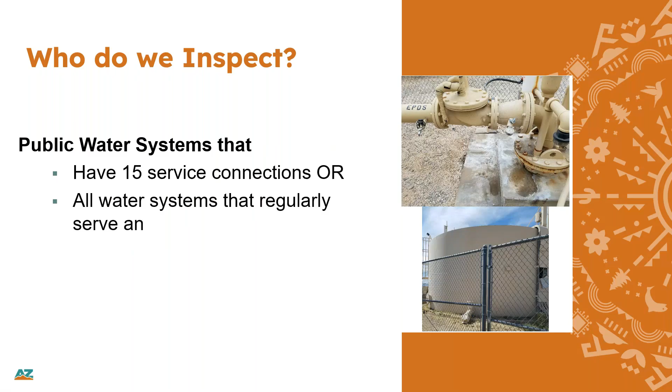There's more definitions for what a public water system is. It could be serving a population of 25 or more people for at least 60 days out of the year. There's some differences in what types of water systems there are, like community water systems, non-transient non-community water systems, and the third type being transient non-community water systems.

Each of these have their own criteria. Community water systems are more of your larger municipalities, your towns, some of the domestic water improvement districts. Non-transient, non-community areas are places like schools, office buildings, business plazas. The transient, non-community water systems are water systems that serve like gas stations, rest areas, restaurants, truck stops.

So the cadence in which we do drinking water inspections varies. Generally, we conduct drinking water inspections for community water systems more frequently than the non-community water systems. Typically, it's about 3 years for community water systems, nothing more. We wouldn't do drinking water system inspections for community water systems every 5 years. We want to be out there at the very least every 3 years, and vice versa, at least every 5 years for the non-community water systems.

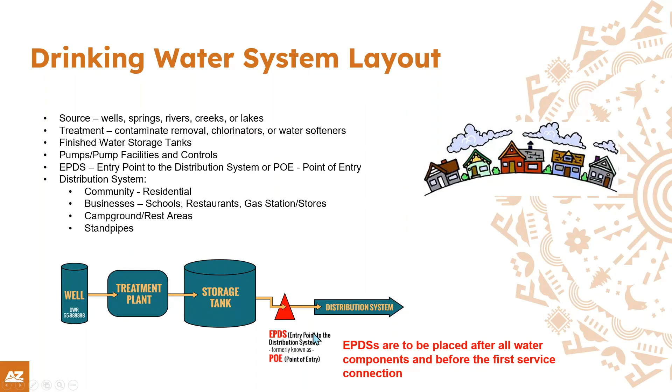So in general, as an inspector, we would want the water system to be in compliance by the time the inspection is scheduled. Water system owners and operators are responsible for protecting the health of their customers and maintaining their system and trying to be in compliance is what we want for all the water systems in Arizona. ADEQ inspectors will provide the system with all the information needed to be in compliance by the time the inspection occurs.

I'll break down how the process is when we start to reach out to you to schedule drinking water surveys. So again, just to break down the definition of a sanitary survey, it's based on a physical inspection of the water system, which includes how the system is operated and maintained. The sanitary survey is assuring that drinking water is safe by identifying sanitary defects and problems which may affect the safety of the water.

ADEQ has 3 types of inspections. There's the ADEQ file review, which is conducted for all sanitary surveys. File reviews can also stem from complaint responses or level 2 assessments, which requires a site visit. The other 2 types of inspections are unannounced sanitary surveys. All my time here at ADEQ, we've always had announced sanitary surveys. This would be a rare occasion if a sanitary survey was to be unannounced.

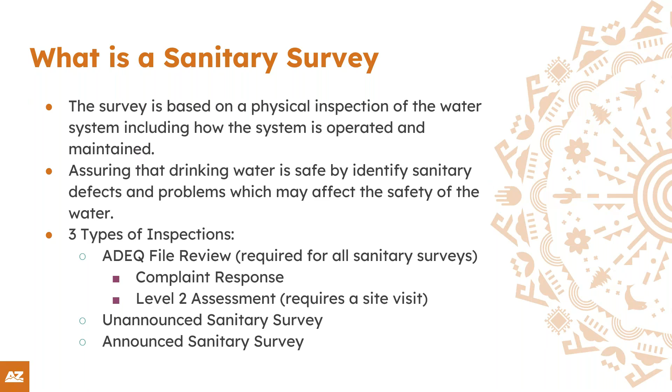And then, of course, there's a 3rd type, which is the announced sanitary survey. During the announced drinking water inspection, I mentioned before that we'll start to reach out to water systems when they're approaching their drinking water sanitary survey routine inspection. So we would reach out, whether it be a phone call or an email, to the main contacts or the administrative contacts of the water system.

We'll agree upon a date and time for the sanitary survey. And this can vary. We can reach out as soon as 2 weeks before we try to schedule this sanitary survey, or as soon as 6 weeks before, depending how complicated the system is or how large or vast a system can be as well.

We'll typically follow that phone call up with a confirmation email. Again, in that email, there's going to be more details, date and time we'll be meeting, the location where we'll be meeting, a little bit of tips and reminders in there that, for example, ADEQ inspectors don't climb storage tanks, and water systems are required to provide evidence, photographic evidence, or someone on site at that time during the inspection to provide the evidence that there's a storage tank hatch gasket, that there's a screened air vent on top of the storage tank.

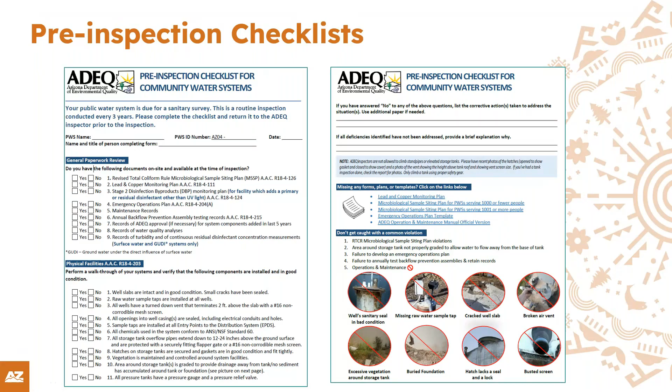Steps to take for a compliant inspection: while we schedule that sanitary survey, we also want someone available who's knowledgeable about your water system. It would be great if owners were available to be on site. If you want your operator to handle the site visit, that's fine, but we want them to also be knowledgeable about all components of the water system.

Few and far between, we have systems that designate someone to be available during the inspection, which is fine. But once we start asking questions and getting more 'I don't know' answers, that's what we're trying to avoid during these sanitary surveys, because we're trying to get a good idea of how the water system is running, whether on a day-to-day or month-to-month basis.

Water operators, owners, admin contacts, if any of those folks can be available during inspection, that's what we want as ADEQ inspectors.

We also provide this link to the external site. You can look at your water system's profile, and it shows your facilities if you need anything updated or changed. This doesn't have to just be during the inspection, it could be any time of year. You can use this link to see what your water system's profile looks like to the public facing community. If you want to check on open violations or missing monitoring and reporting items, this link helps with finding those out as well.

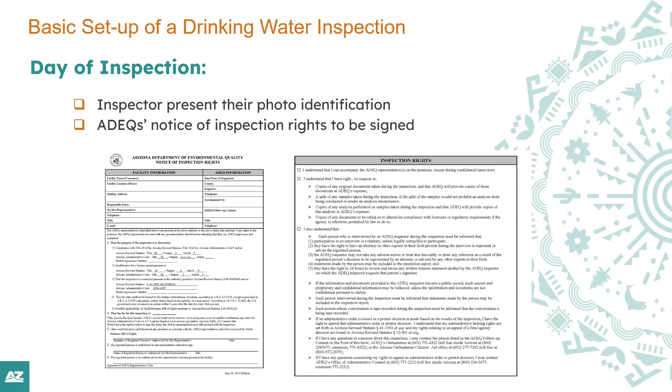Once we get the notice of inspection rights out of the way, we'll start looking at paperwork. A lot of systems do electronically send us these documents via email prior to when we get out there, and that saves both parties time. It allows us to start looking at the physical components of the water system sooner, and the inspection goes from like a 3-hour sanitary survey to maybe a 1.5-hour sanitary survey, or it definitely cuts down time.

So feel free to send emails to inspectors when we reach out to you, your current sampling plans and your emergency operations plans, records of analytical data, if the system is missing any monitoring or reporting items. Again, we kind of mentioned that with what the CAC reaches out with if anything's missing. We want to make sure that all water components within your water system have their applicable permits or exemption documentations. If you have any treatment going on, we want to make sure you're maintaining your maintenance logs, and then backflow records. We want to make sure, for systems who have backflow assembly devices, how are you maintaining your records, how are you keeping track of past due annual testing requirements, so on and so forth. And then last, we'll do the physical components or the walkthrough of the facility.

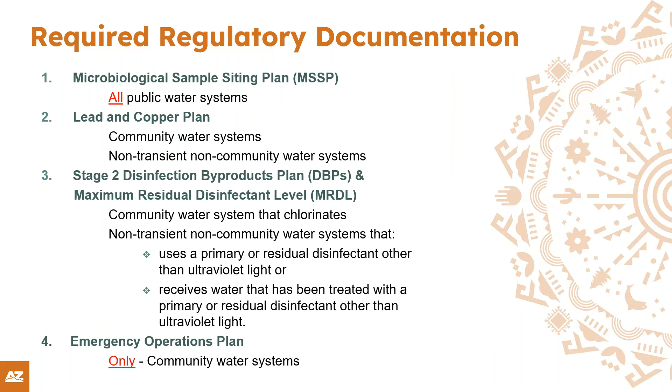Going into the microbiological sample siting plan, there are 2 types of templates water systems can use: one for population less than 1,000, and one for population more than 1,000.

The stage 2 disinfection byproducts plan - again, this is for systems that chlorinate. We also have a downloadable template here. You would typically work or be in contact more with the compliance assistant coordinator if you have any additional questions for this one, as they review and approve these sampling plans specifically.

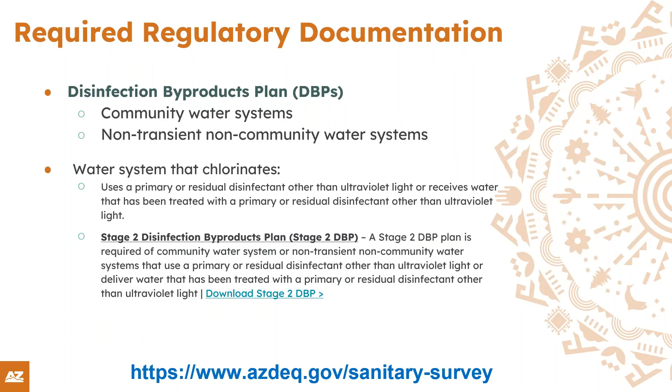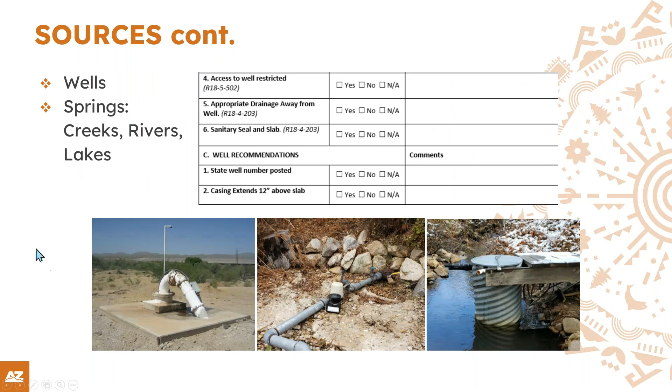Going into a couple more example photos, the well slab - this one looked like they sealed it, there would have been a crack here. This one definitely would need a brand new slab, because you wouldn't be able to seal this with a sealant to have a well slab that meets Engineering Bulletin 10.

And then also these wellheads here look like they're in a floodplain, and a lot of sedimentation moves around, and it would need to be rectified, where you'd backfill this slab or reconstruct a new well slab so this wouldn't be exposed during flooding events or anything like that.

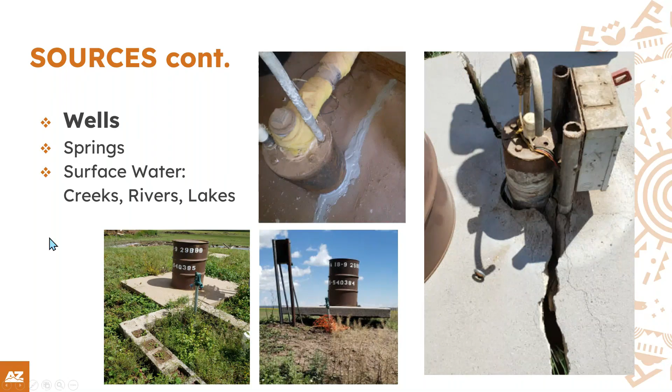In these examples, there's no well slabs in all of these photos. Again, that comes from Engineering Bulletin 10, so there's certain requirements that all wellheads need to meet. And these would have all been identified as potential deficiencies during the inspection.

For springs, these are photos that one of the inspectors took out in the field. There's makeshift filtration intakes where the system used a PVC pipe, and there's some screens in there that are separating the sediment from where the water intake is. We would want a more protected intake than this.

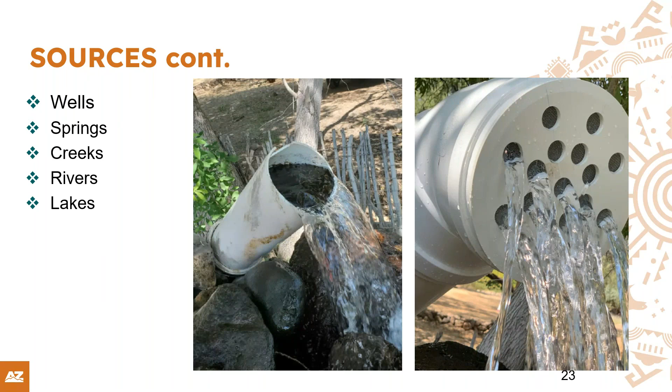There's spring box requirements also in Engineering Bulletin 10 that systems can refer to. Some more example photos of unprotected or unsecured well sites. This fence here, it's cut, and anyone can access any of the components in that area.

This is a good example of how some systems protect their wells. They build a well house with a key and a lock, and it's protected not just from people, but from weather - makes your well last longer and less likely to get rusted out sooner than later.

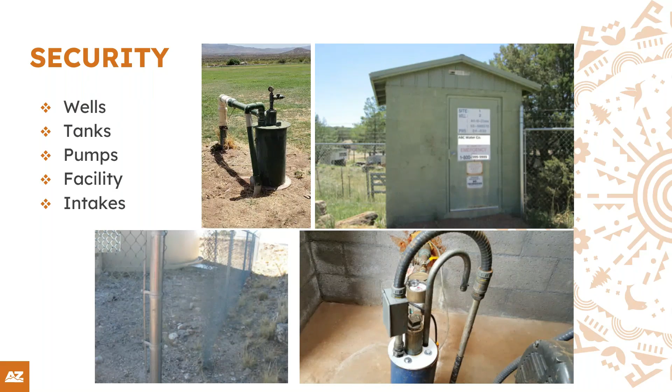And then more photos of fencing protection around water components. Sorry, these photos came out blurry, but they're just fences around finished storage tanks or treatment facilities. And that's what we would want to see for systems protecting their water components.

Going into disinfection, if your system has a chlorinator on site, we'll be looking to make sure that it's in a secure area, and that the product you're using is NSF approved. There should be a label on there - I think the next slide has an example of that.

Here's a liquid chlorinator, usually sodium hypochlorite, a breakdown of typically how those chlorinators are set up. And then to the right here is an example of UV disinfection. We'll take note of those items.

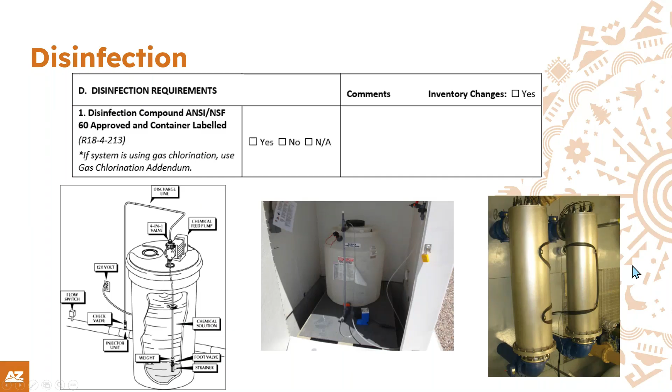So we do come across systems that use pool chlorinating liquid for disinfecting their water system or their water supply, and that's not what we want to see when we're out there during the inspection.

Going back to the NSF approved chlorine, these labels here - what we are looking for is that they should be stamped or notified that they're NSF approved.

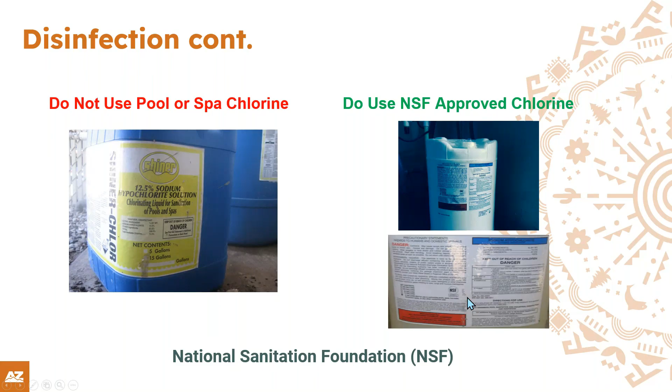If your system uses gas chlorination, we have an addendum for that in our report. It goes over what we're looking for if we come across like a 2-ton chlorinator, if the weight scales are working, and how the system replaces their gas chlorination.

Disinfectant recommendations. If any of these were not met, it wouldn't be seen as a notice of opportunity to correct. These would just be recommendations, like we would hope that all water systems have these readily available for their employees when they're dealing with gas chlorination.

Is a bottle of ammonia water available for chlorine leak detection? Are the chlorine cylinders and chlorinators in separate rooms? How are you guys maintaining the records of the weight of these gas chlorinator cylinders?

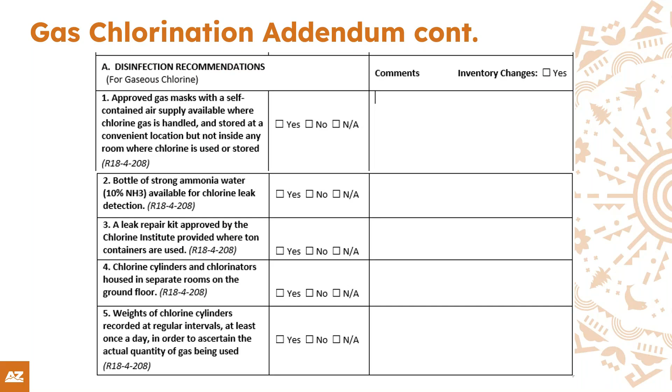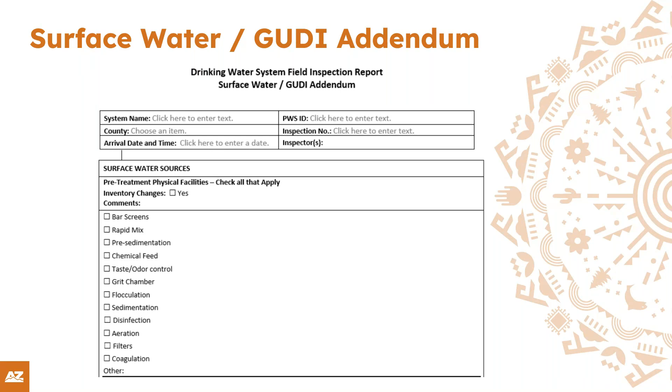If your water system is a surface water or a GUDI, we do have an addendum for that as well. We'll do a walkthrough of your surface water facility from the intake. Are there bar screens there? What type of chemical feeds do you have? What type of flocculation, if any, are present? Is there disinfection? Are there filters? Is coagulation? How's the coagulation process? Are there any chemical additives being used aside from chlorinators, like liquid chlorine, polymer, ferric chloride, the pre-sedimentation? Are there screens, bar screens or wire mesh screens? Are the intake pumps functioning properly?

We'll take a look at if any water source water measurements are being recorded, and whatever is available for us to see at that time of the inspection, we'll make notes of what the pH is, turbidity, whatever readings the system usually has at that time. We'll record those during the inspection.

If there's a coagulation process, what is the process like? Is the machine working? Are the mixers in use?

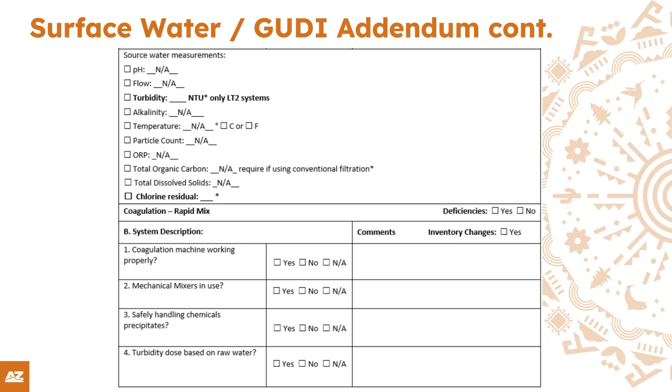Treatment in general, we've got systems that do have to install treatment to meet safe drinking water requirements. Some of the more common types of treatment, a lot of water systems in Arizona end up having to install treatment for arsenic or nitrates. And if they do, what types of treatments are installed? If it's a surface water system, are they doing 4-log compliance monitoring? Are there operations and maintenance manuals available to review for any types of treatment components that are on the system?

Again, is there an O&M plan ready to review? Is it updated frequently? And then, how many POUs are installed on the system? Why was there 20 in the last inspection and then 20 more installed? Were there permits for the additional 20, or was there notification to ADEQ that 20 more POUs were installed, and why? So we get a current update on these types of components that we get completed during sanitary surveys.

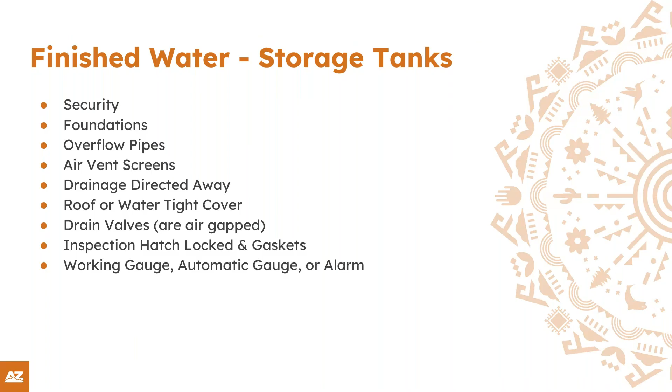That any drain valves are air gapped, inspection of the hatches and the locked hatches and gaskets are in place. And then, do the gauges work? What types of gauges are they? And how does the system keep track of where their water level is for these water storage tanks? And this is how it would look in the report section: yes, no, not applicable.

More photos of what tank foundations we would want to see around storage tanks. This is a good example. No vegetation, the tank ring is exposed. It's not covered by additional sediment. The lip of the storage tank isn't covered with soil or rocks. It's not getting rusted out. Again, the same type of good example on the right side. It's within secured fencing.

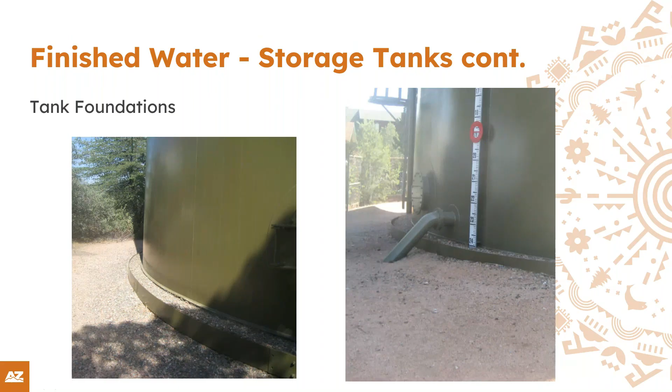These seem to be a smaller version of these. I would say these are probably 20,000 gallon or 30,000 gallon tanks, and then we come across poly tanks every now and then. So here's a good example of how a system created their foundation for their poly tanks with their rings exposed.

To the right here is not what we would want to come across for storage tanks and water systems. There's some vegetation growing around this area. There's an RV that's parked a little too close to the storage tank. And I would bet that there's no fencing around this storage tank as well.

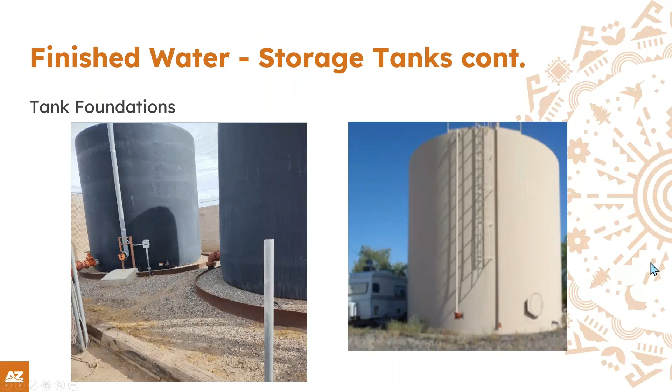Another aspect we come across are trees and branches protruding towards the storage tank. That's something we don't want to see. We'll ask the water system to trim the trees towards the storage tank so that the tank is protected and its integrity isn't in jeopardy.

We're going to be looking for overflows and screened overflows. If your overflow has a flap, is there a gasket in place? Is there a proper distance or air gap from the ground? Or if it's going to drainage, is there proper air gap or space separation from where the water leaves the overflow?

Here's a good example of someone providing a measuring tape showing a good air gap from their overflow, and you can tell here that it's screened. So these are some good examples of storage tank overflows that we're looking for.

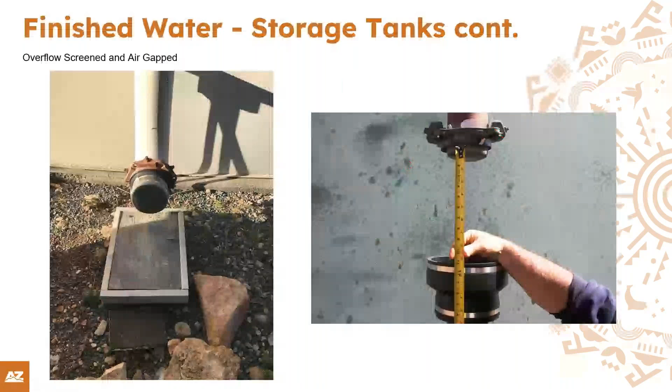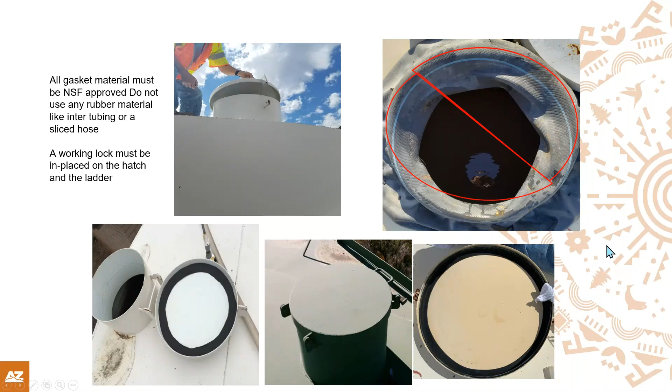If you've got pressure tanks, we're going to be taking a look at whether there are operational pressure gauges and a pressure relief valve. Some water systems have water level gauges that are insulated, so if there's insulation on there, we'd want the system to remove it so we can take a look at the condition of that water level gauge.

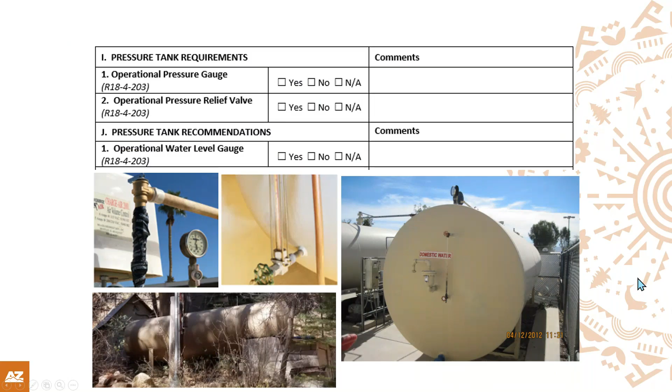We want to ensure that the system is providing good water pressure throughout their water system, so we're going to be looking for these pressure gauges to make sure that nothing less than 20 PSI is observed during our inspection.

We'll take a look at backflow prevention documentation, and whether there are correct assemblies in place for commercial service connections like restaurants, hospitals, or car washes. If there's not, that would be a potential deficiency, because you want to protect the community or your customers as well as protecting your water source from possible incidents regarding backflow.

If you're connected with a non-potable system, are there correct labels? Is there correct backflow prevention between those two, your potable and non-potable connections?

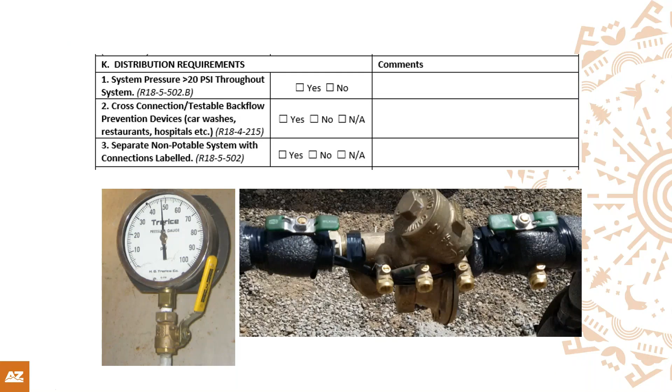And then for communities, we do check for their emergency operations plans. The plan should address all of these items and what the system will take to assure continuation of service following any of these emergency situations. This is a requirement of Title 18, Chapter 4, Article 204 of the Arizona Administrative Code.

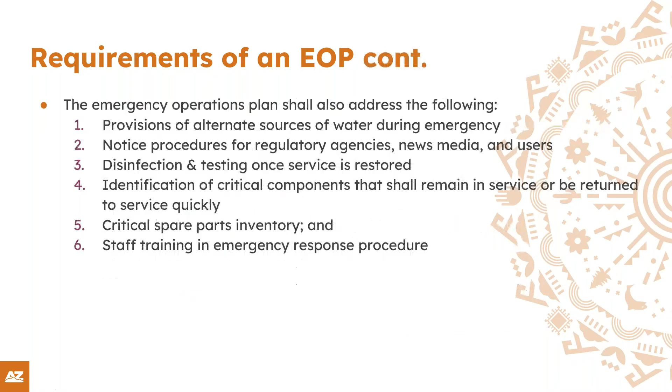These requirements are typical for all community water systems regardless of size, and they're required to be developed and maintained in that document. The document should detail physical and technical aspects of the water system's operations, such as maintaining proper water pressure, collapse of a major structure, or loss of mechanical components like pumps or valves. What is the alternative water supply? The EOP should also address public notice procedures for consumers and regulatory agencies.

The best way to describe this document: step one would be contact your water operator, since they should be knowledgeable about these emergency procedures. However, if a system were to sell their water system, or the owner and operator are on vacation for a whole month and something happens with the system, this would be the document the person in charge would look to for what procedures to follow if situation XYZ were to happen. That's what we're looking for, water systems to have this readily available on site or in digital copies. We just want to know the system has a process where this is kept and everyone knows about it and knows where to find it.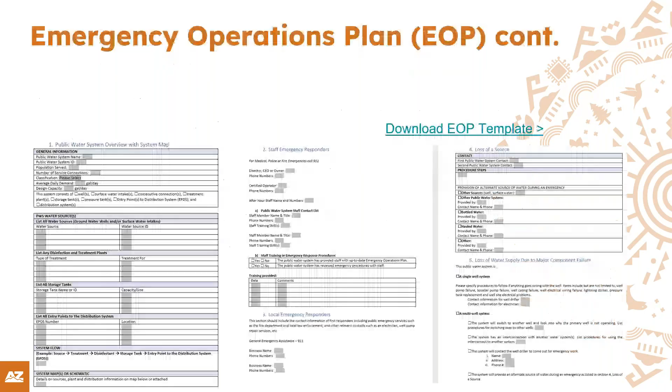Okay, that's pretty much what I had mentioned earlier. Here's an example of our template that we provide in the pre-confirmation email, as well as on our ADEQ website. Since these presentations will be available for everyone later on, these links do work. So if you don't have an emergency operations plan, or want to update your operations plan, you can follow this link and it'll take you to this fillable document. Everything required to be in the emergency operations plan is in this template. You just get together with your operator or staff and start filling out these areas of the document, and then during the next inspection, when they ask for the EOP, you just provide that document.

Okay, going back to the inspection report, we'll take a look at the pumps. Are they in an enclosed building? Are they protected? Are there leaks? If there's leaks, that would be a potential deficiency.

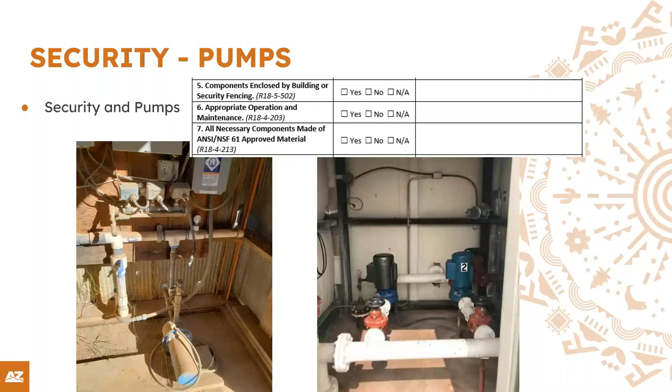Do these components, such as wells, storage tanks, and treatment facilities, have their approval to construct and approval of construction documentation? That is one of the main paperwork documentation we'll ask about if, during our file review, we don't find any of these documents. All systems should try to have a good historical process of saving correspondence from ADEQ, any approvals, exemption documents.

Operators requirements: if you guys have an operator in direct charge, are they certified at the correct grade that the facility is required to have? If your facility is a grade 3 or grade 4 facility, whether distribution or treatment, are there operators on site for those water systems? Is the relief operator correctly certified, no lower than one grade below the water system? If you have a remote operator, are they within 200 miles of the facility? Is the remote operator inspecting the water system at least monthly to ensure proper operation and maintenance? Does the remote operator instruct or provide written instructions to the on-site representative?

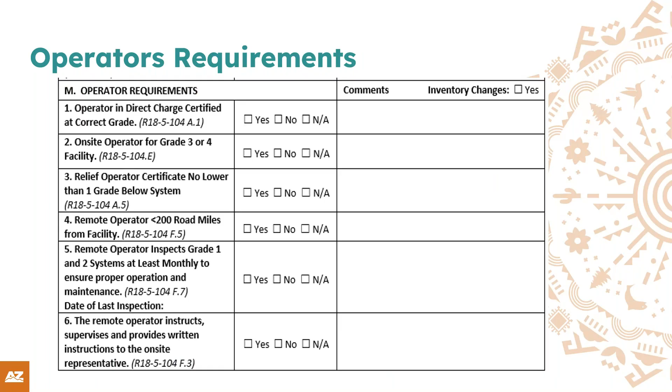If you do have a certified operator that is a remote operator, and you, as the system owner, want to be a little more up to date with what they are observing every month, ADEQ has this operator monthly inspection form that system owners and admins can use or work with their certified operator to conduct every month. It's just an inspection form covering what time they came to the system, who they were with, who the operator was, and what their observations were when they came by. Was the disinfectant being used properly? Is the chlorinator properly working? Was the screen torn at the overflow, or was the air vent at the well broken? Does it need to be replaced? So it's a good practice to have a good record of your operation and maintenance for a facility.

Towards the end of the inspection, there will be a section in the report that discusses observations, recommendations, and potential deficiencies. For example, if you have a cracked well slab, that will be noted in this section. If the ATC or AOC was missing for 3 brand new storage tanks observed during the inspection, those items would be noted here as well. Any inventory changes to the water system would be noted in this section too - population changes, service connection changes, inactivation of system components. If you need to update, say John Smith left and William Smith replaced him, that information would be here.

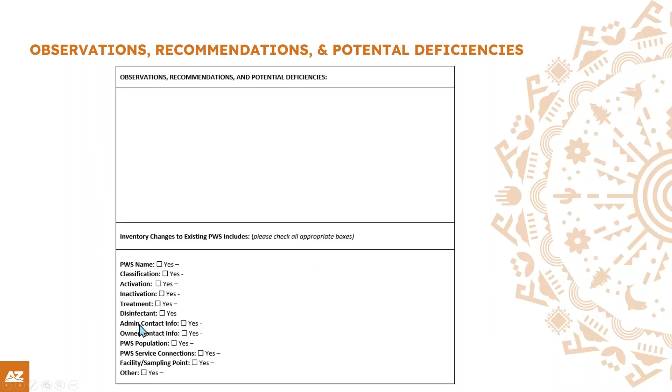Last is the system grade. We'll grade all water systems every time we go out for inspection. The grades aren't based on pass/fail type grading—it's based on the complexity of your water system.

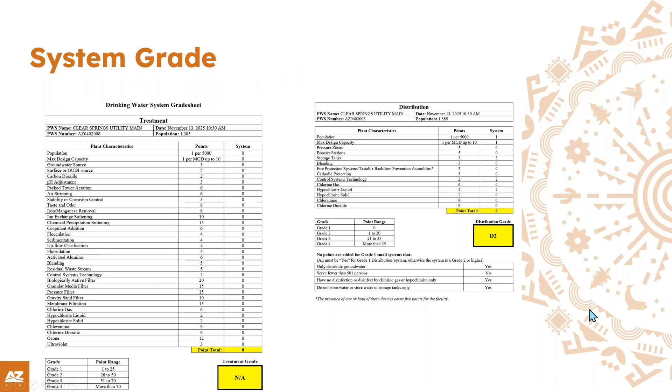Last on the inspection report is the result of the inspection. To tie it back to the beginning of the presentation, if there were no issues or deficiencies observed, the result would be checked off as such. If there were deficiencies noted but the system was in contact the day of or day after—like with corrections or missing documentation—that would be the result: no ADEQ action will be the result of this inspection.

However, if there were no permits found, or if the well slab was not in place but it's going to take time for them to install it—it's not going to take a day or two—then the result would be that alleged deficiencies were noted during the inspection, and correspondence regarding this will be forthcoming.

So this goes into Natalie's portion of today's presentation—she'll take it over from there.

That is all I've got for what to expect when inspected. Hopefully I was able to clear some things up or give information that will be helpful for public water systems when they have inspections coming up.

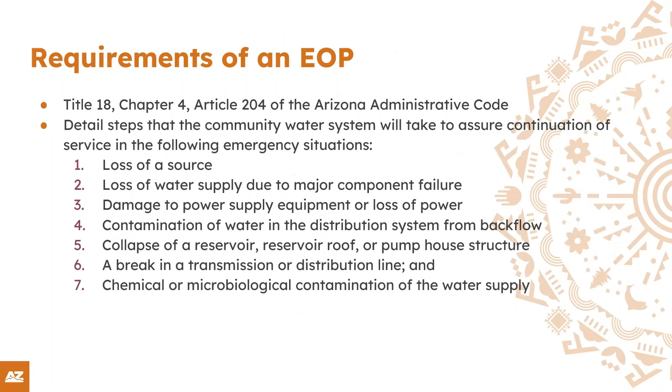The question: if pressure gauges are not connected to hydro, but placed before hydro, between the booster and hydro, inside a well house to protect them from weather, is that okay?

Yeah, we don't see an issue with that. Preferably we would want pressure gauges before and after hydro tanks, just in case there are differences in different portions of the water system. But that wouldn't be an issue if we were to come across it—if that weren't in place during inspection, it wouldn't be an issue during the inspection.

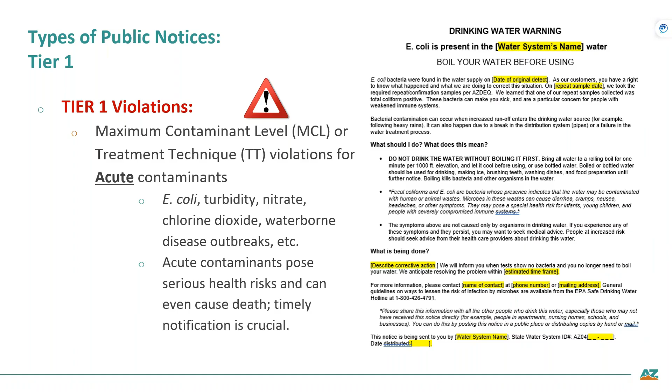There are different distribution methods for each type of public notice. Tier 1 public notices, for MCLs or acute contaminants, have to be issued within 24 hours of the notification of exceedance. You can do that through television/radio broadcasting, posting within the system, like if you're in a school, you would post it above the water fountains and the bathrooms, that sort of thing. Hand delivery, or any other delivery method approved by the regulatory agency.

And then we have Tier 2 public notices. Those are for chronic contaminants, MCL violations, or treatment technique violations. So those will be for arsenic, TTHMs and HAA5s, radionuclides, VOCs, SOCs, assessments for RTCR, which is the Revised Total Coliform Rule, lead and copper treatment technique violations, anything that has long-term exposure and can pose serious health risks.

This is another example of a template from ADEQ that you would use if you had arsenic above drinking water standards. These are issued within 30 days of notification of the violation, so it's different from Tier 1. Tier 1 is 24 hours, Tier 2 is 30 days.

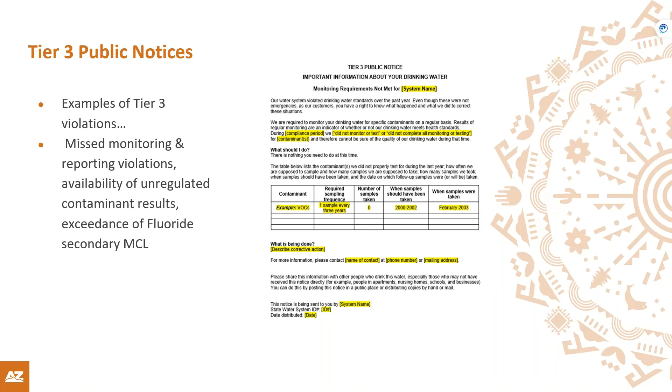And then we have Tier 3 public notices. Some examples of a Tier 3 violation would be missed monitoring and reporting violations, availability of unregulated contaminant results, or exceedance of a fluoride secondary MCL. This is another example, just about missed monitoring. It shows the contaminant, the required sampling frequency, number of samples that were required, when the sample should have been taken, and when they were taken.

And then here are the distribution methods for a Tier 3, which we went over already. This would be issued within a year of notification of the violation, but the sooner the better. So this isn't necessarily saying you really should wait a full year to do the Tier 3, but you technically do have that time to get it done.

For non-community water systems, it's the same—they can post in conspicuous locations, do publication, emails, or central locations. But community water systems can also post online, or put it in their CCRs, their consumer confidence reports. So that would work too, if you wanted to do that instead of posting and waiting the whole year, you can just put it in your CCR.

So here's some scenarios. The Tier 2 public notice issue within 30 days—an example would be the running annual average for TTHMs, a Tier 1 annual nitrate sample exceeding the MCL, or a routine monthly RTCR revised total coliform rule sample coming back total coliform positive or E. coli positive, and the system fails to take its repeats, or a repeat sample is total coliform positive.

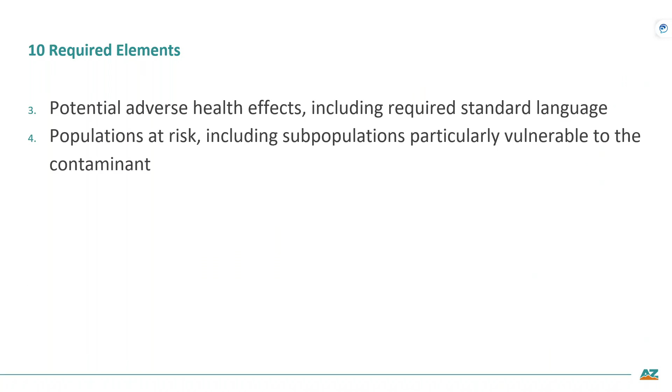It has to have the potential adverse health effects, including the required standard language, and populations at risk, including subpopulations vulnerable to that contaminant. This example says people who drink water containing arsenic in excess of the MCL over many years could have skin damage, problems with their circulatory system, or increased risk of cancer.

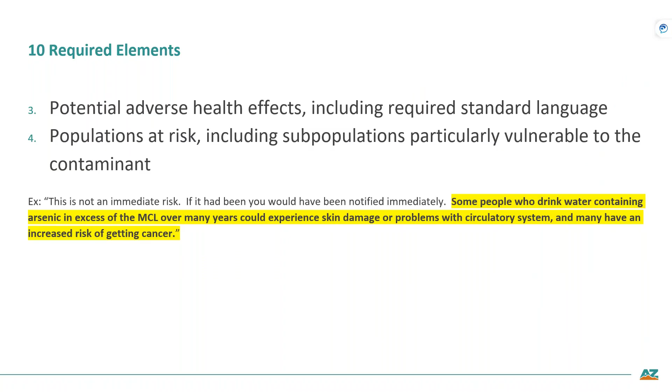It also has to say whether there is an alternate source of water that should be used, what actions consumers should take, including seeking medical attention if needed, and what the system is doing to correct the issue and when it's expected to be resolved.

So this is an example here. It says you don't need to use an alternative water supply, but if you have specific health concerns, consult your doctor. They are installing arsenic removal treatment, and they anticipate it'll be resolved in 6 months.

And it will have the name, business address, and phone number for the owner and operator of the system, along with a statement encouraging recipients to further distribute the notice to other water users in the system. This is just an example with some contact information.

And this one, I think, is in every template that ADEQ has. It says please share this information with all the people that drink this water, especially those who may not have received this notice directly—people at apartments, nursing homes, schools, businesses. You can just post this in a public place.

They also have multilingual requirements. So if you have a system serving a large number of non-English speakers, like in other areas in Arizona—there's a lot of Spanish-speaking areas, or on the reservations—we definitely want to have the appropriate language for people so that they're able to have a translated copy and understand the notices.

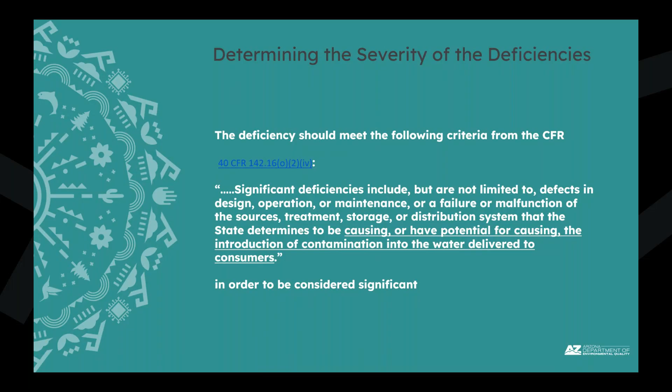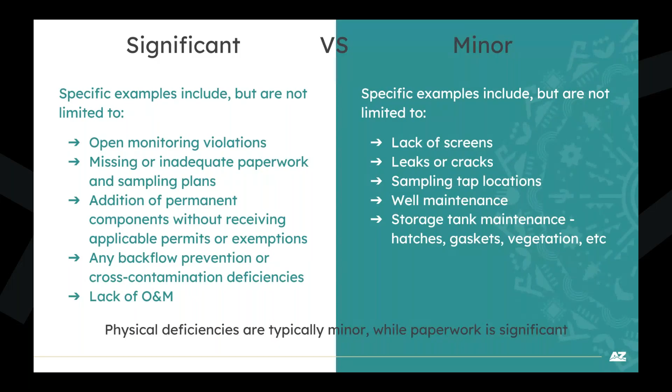Diving a little bit more into the storage tank photo requirements, because it's something I see quite frequently. We do not climb storage tanks no matter the height and also no matter how good the view is at the top of the tank.

Therefore, we require the photos of the hatch and the gasket, so hatch open and closed, and the vent if you can't see these things from the ground, so the vent screen as well.

You guys, systems and operators, should be sending photos before the inspection or have them ready to show during the site visit. This will allow us to comment or have you get back up there if necessary to get a better photo, either before the inspection or during the site visit, as opposed to going back and forth after the visit during email to talk about changes that might need to be made.

So those are just some things we look for. I have some example photos on the next slide.

So we want to see that the hatch is locked, secured in some form or fashion, either at the hatch itself or the ladder that takes to get up there. We're looking to see that the gaskets are in good condition and fit tightly, they seal the hatch. And we're also looking to see that the storage tank vent is screened with non-corrodable mesh, number 16, of course.

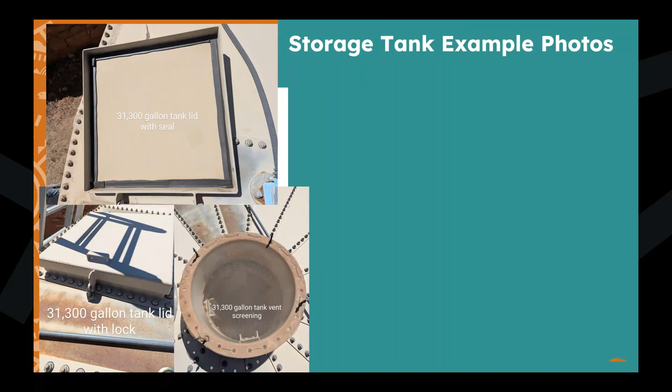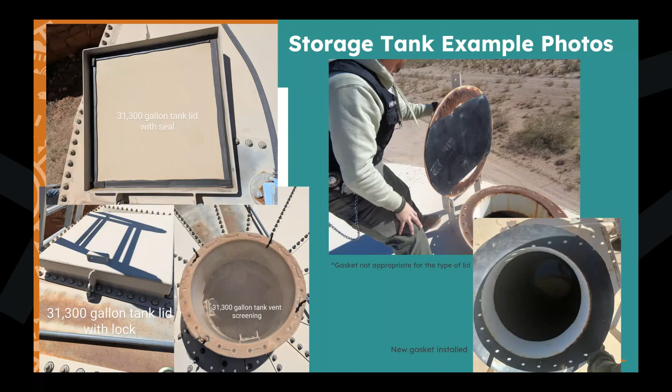I also have an example of a gasket that's not quite appropriate for the type of hatch we're seeing here. It doesn't create a full seal on there. So this was a minor deficiency that I called out on site, obviously when I saw the photos, and then translated it into a notice of opportunity to correct, or an NOC. This is the result of that NOC, a new gasket that's appropriate for that bolted type hatch that was installed.

I also want to quickly go over an example just to whet your guys' interest, of inspectors finding a minor deficiency, but because it poses a risk to human health, that's when we can use our best judgment and that first regulation I showed you, to take something that possibly could be considered minor because it's a physical deficiency about operations and maintenance, but turn it into significant because of the human health aspect to it. So we can and should use best judgment to determine if something that was minor is now a risk to health in any form or fashion.

So this is a personal example that I saw. An underground reservoir that's being utilized as a floating storage tank. Open the hatch, there's a bird's nest in there. The bird's nowhere to be found, which was a little bit concerning, of course. The questions that came into my mind were, how did the bird get in? Where is it now? And is there any lingering, harmful bacteria that this is adding to this tank that is then getting fed out into the distribution system?

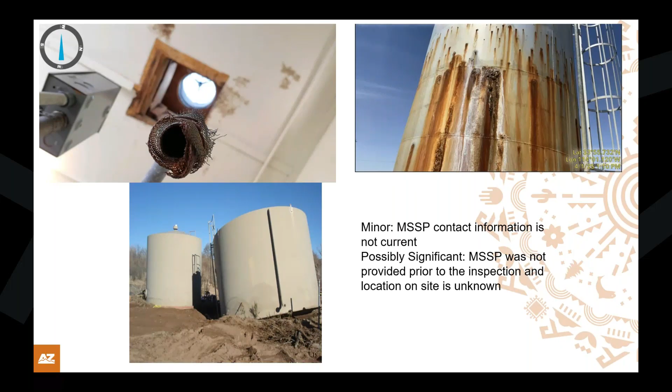I wanted to dive a little into recommendation versus no deficiencies. Are they the same thing? When we're talking about these in relation to a case letter, yes, they are the same, because finding no deficiencies or simply making a recommendation on site does not lead ADEQ inspectors to generate a case letter. So if your inspection report cites no deficiencies and only has recommendations, give yourself a thumbs up, because there won't be a case letter generated, no NOC or NOV that you'll have to tackle later.

With the caveat that if the same recommendations have been made inspection cycle after inspection cycle with no improvement, the inspector does have the authority to cite the system for inappropriate operation and maintenance. Of course, if the recommendation doesn't really affect water quality or consumer health at all, we'll probably leave it as a recommendation. But if something has gotten worse over time with no fixes, that is something the inspector could cite as inappropriate operation and maintenance.

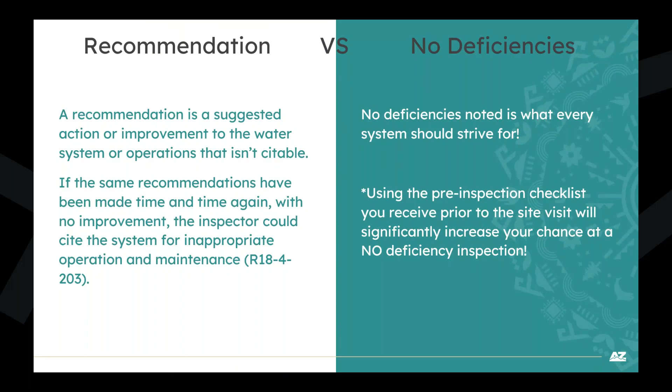And then, of course, no deficiencies is what every system should strive for. As Laprelle mentioned in her presentation, that pre-inspection checklist we send in the pre-inspection emails, if you're using that and going over it prior to the site visit, that's going to significantly increase your chance at a no-deficiency inspection. This checklist has everything we're looking for, including a second page with photos. Going through this checklist with all yeses gives me a good idea that when we get on site your system will have no deficiencies, because this is exactly what we're looking for.

A few example photos of systems that had called out deficiencies during the inspection and had a case letter as a result, showing the difference between non-compliance and compliance, and what was able to close out that inspection. So this is a before photo. The chlorinator was obviously not being used, kind of hard to see, but very dusty.

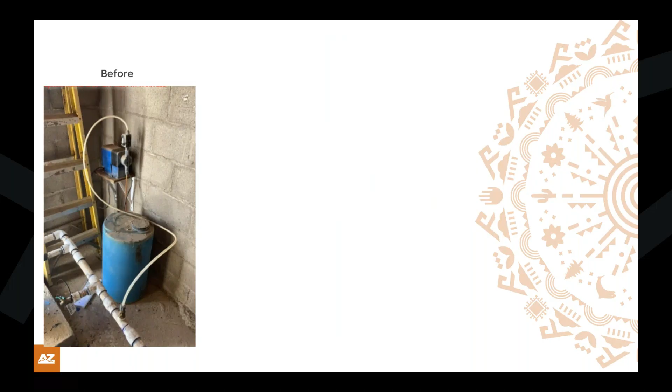Open that lid right there, and there was some stagnant water in there as well. So a bit concerning, it was still connected to the system with that stagnant water. This is what I accepted as compliance, so completely disconnected from the injection point.

The chlorinator drum itself was cleaned up a little bit, I think washed out as well. This chlorinator was also not permitted, so kind of a double whammy there of having that stagnant water possibly being able to be pumped into your system and not having it approved by ADEQ. But the disconnection of the chlorinator and cleaning up of the drum was enough to achieve compliance for the system, and you can see it looks a little bit better in that after photo as well.

This is quite an extreme transformation, but this is a well that one of the inspectors saw on site. A lot going on here: no slab, maybe some holes in the casing at the top there, some general maintenance needed for exposed wires, vent screens, etc. A lot going on here.

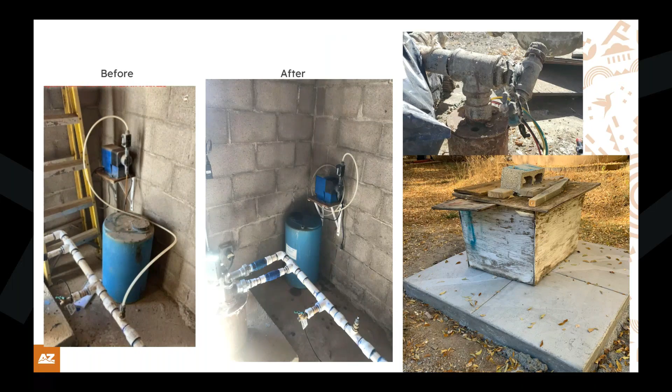Obviously a case letter was generated, and this is the final result of what that used to look like and what it looks like now. So inspectors use these deficiencies and case letters to make improvements for your system, to have you guys make improvements for your system that will hopefully keep the longevity of your system for years to come.

So things that are going to help your system, things that will prevent you from having to do larger work later, is really the goal of creating these case letters and giving you guys deficiencies - to keep everyone healthy, of course, and to keep your system components as long as you can with as little maintenance as you can, right? And we can all agree that this after photo looks significantly better than that before photo in both of these cases.

I wanted to touch a little bit on deadlines. So ADEQ inspectors give the system a compliance deadline to reach. The NOC or the NOV will have that timeline for each of the deficiencies that we saw on site. These deadlines cannot exceed 120 days. We do not have in rule the ability to give a system more than 120 days. Even if we think it's necessary, we're kind of handcuffed by that rule.

But we can also give deadlines as low as 15 days. Let's say for a public notice requirement that's 4 years past due - it's time to get that in. We'll give you a shorter timeline if we think you can reach it. But of course, the timeline should always be reasonable.

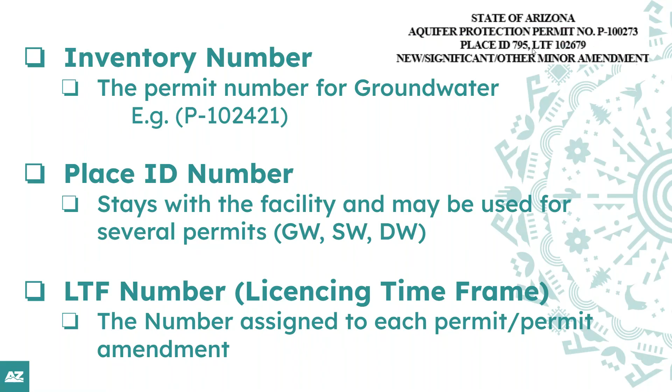If you go to the top of your permit, you'll see your permit number, your place ID, and your LTF number. The permit number stays with the life of the facility, as well as the place ID. The place ID, though, can be linked to more than one permit or more than one environmental program at ADEQ. The LTF number is the number of your most recent permit. When you come in, you get an LTF, so each permit amendment will have a different LTF number.

A general permit is also a form of an APP. General permits typically don't require the monitoring that is required by an individual permit, so ADEQ highly encourages facilities that can be on a general permit to get one. There are also some historic facilities in Arizona that are on the 1.09 general permits, meaning they didn't have to get an individual permit as long as their facility did not expand. Sometimes facilities come in thinking about putting in biological treatment, but if they can stay on the general permit, we highly recommend that they do.

Here's a copy of the cover, the first page of our permit. There we'll have the groundwater basin listed, and I got all these sites listed on here so that if you have the opportunity, you can go and play with them, because it's interesting to know the different basins in Arizona. The owner name and information - the owner must be registered and in good standing with the Arizona Corporation Commission to get a permit amendment.

If it's a non-private entity, we usually do a name search just to ensure that we're getting the name of the facility, name of the owner correct. For instance, we had a permit come across for a town of, but since they had incorporated, it was now the city of.

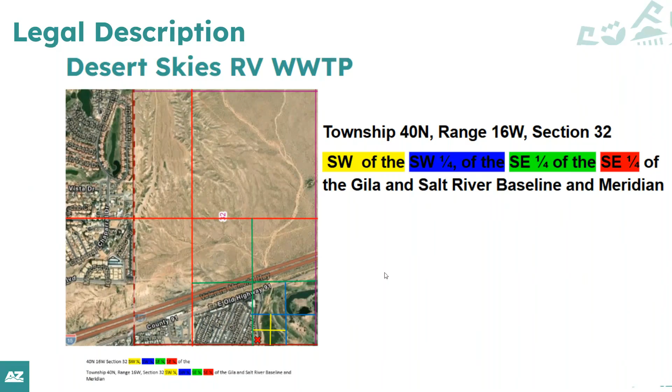Do you know the grade of your wastewater treatment plant? If you have a permit that hasn't been updated in the last 4 to 5 years, then it's not graded on your permit. Currently, we actually put the grade of the facility, because when you look at rules, the rules say a wastewater treatment plant is designed to serve so many people, whereas a collection system actually gets bigger as it grows.

A lot of old historic people, including myself at one time, thought the wastewater treatment plant was also based on the number of people we were serving, so it would change as the facility was going, but that is not the case by rule. So we actually put the grade of the system and how often an operator needs to show up to that system in the first paragraph of the permit.

The way we figure that out, we're kind of conservative about it. We use 80 gallons per capita per day per person right now, which is in Table 1, Unit Design Flows. So a grade 2 system, for example, is a facility that employs biological treatment based on the activated sludge principle or trickling filters and is designed to serve 5,000 people. So 5,000 times 80 gives us 400,000. Realistically, if you have a 400,000 gallon per day plant, you can actually serve more, because flows are less from people today than they were back in 2001 when we created these rules.

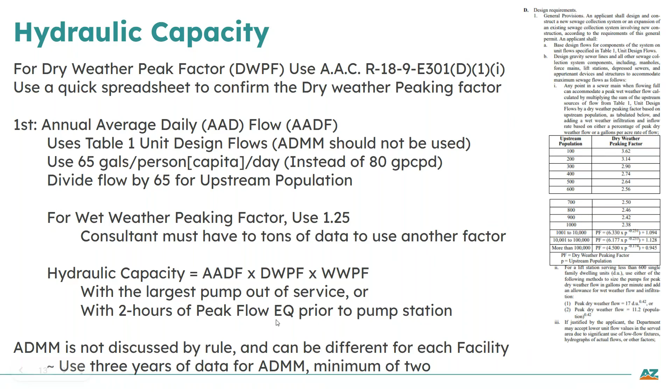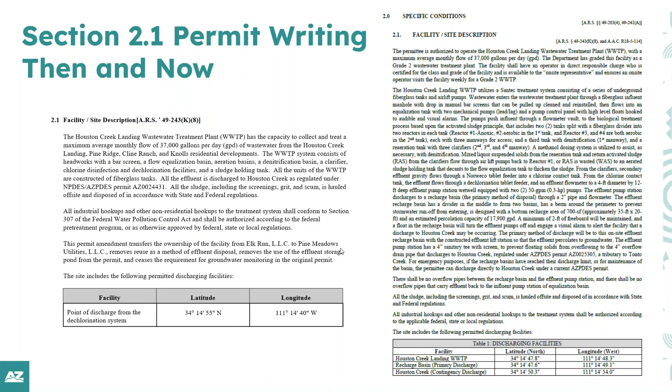Annual registration fees are in R18-14, and you can find there the APP annual registration fees and the AZPDES registration fees. These fees are based on section 1.1, and what it says is your average day monthly maximum permitted capacity determines how much it is.

Financial capability: if you are a private system, you are required to do some sort of demonstration that if for some reason you went bankrupt and left a wastewater treatment plant, somebody else can go there and close that wastewater treatment plant down. That's required, and typically once every 6 years you have to update that financial assurance mechanism, and definitely once every 6 years you have to update the cost estimate. Sometimes there's just an inflation factor that can be added, or sometimes we want a sealed engineered document doing an estimate for the closure costs.

Federal agencies, cities, counties, any municipalities or sanitary districts are exempt from having to do the post-closure and closure costs, because we assume that a governing board will be there to close anything.

Best available demonstrated control technology is section 2.2. So in 2.2.1, if you're wanting to know who designed your wastewater treatment plant, we'll have it in chronological order, the plans that we received as we've amended permits.

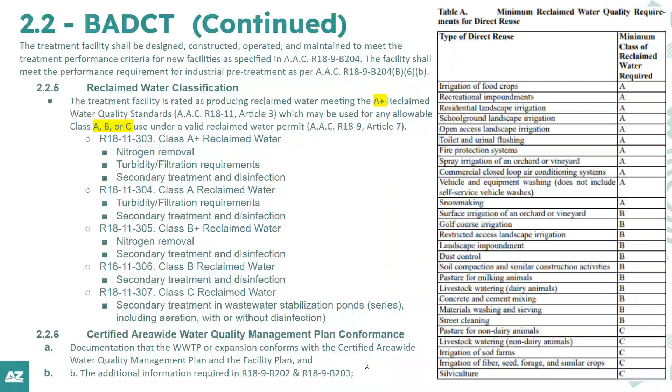Discharge limitations, again, we repeat ourselves a lot in the permit. Here's where we're repeating what your permitted flow is. We have in there that you need to notify all users that material is authorized to be disposed of.

This is your industrial pre-treatment control, which is managed by our surface water AZPDES program. We do greatly recommend that at least once a year you have a mailer that goes out with your bill that talks about things that should not be flushed down the sewer.

The permittee shall operate and maintain all permitted facilities to prevent unauthorized discharges resulting from failure or bypassing of BADCT or treatment works. This is saying you can't bypass a treatment works or disposal works without letting ADEQ know. When you look at the temporary cessation rules, you'll see that you have to renew that and let ADEQ know. That is actually later on in your permit, you'll see temporary cessation.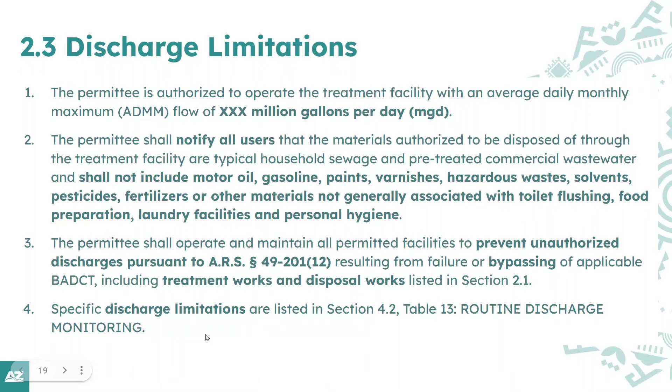Specific discharge limitations are listed in section 4.2. That just tells you that you have a routine monitoring discharge monitoring table that you have to follow. Points of compliance wells are where you have a well to pull groundwater out to make sure that your facility isn't affecting that groundwater.

Some facilities have them. A lot of BADCT A+ facilities, we're managing the discharge. And because we're managing the discharge, we don't necessarily have a point of compliance well. Although if you start having a lot of discharge monitoring issues, like high nitrogen for extended periods of time, the director can amend the permit and make you put a compliance well in.

Typically wells that are monitoring for like a AZPDES discharge or something, we use the R18-9 B204 rules to say a small system is 250,000 gallons. Once you get over 250,000 gallons, then you have to install the monitoring well. That'll be outlined in your permit right underneath table 2.

Here's another one for you to play with. If you'd like to know about well information around your facility, you can go on ADWR, look at their maps, and go around and see the information about the wells in your area.

Monitoring requirements is section 2.5. So you have pre-operational monitoring, which talks about what you need to do with your vaulting and hauling and how you get the facility up and running. Routine discharge monitoring just lets you know that you have a discharge monitoring table at the back of the permit that you have to follow.

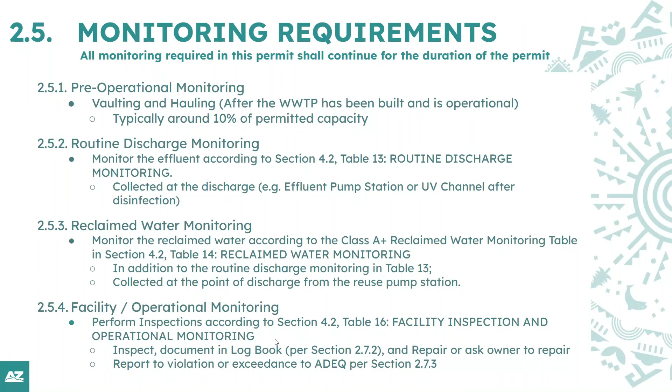Point of compliance well replacement. If for some reason you have to replace your point of compliance well, if you're within 50 feet, you don't have to do ambient monitoring. If you're outside of 50 feet, then you have to talk to one of our hydros to see if you have to do ambient monitoring or not.

Ambient groundwater quality monitoring for point of compliance wells - we require 8 rounds of groundwater monitoring. So you come to ADEQ, tell us how you're going to construct the well, our hydros approve it, you go out and build the well, and then you have to take 8 rounds of samples. Then you bring those samples in, and that's how we set your alert levels and AQLs inside your permit.

A lot of people will be doing this with the AWQS rules that came out recently, because more constituents were added to the AWQS in R18-11.

Alert levels for point of compliance wells. This is how it'll tell you how you're going to set those alert levels. AQLs for the point of compliance wells.

After you do your ambient monitoring, if an alert level is less than the AWQS, then the AQL ends up being the AWQS. If for some reason the alert level, what you tested, you already have something in the water that is above the AWQS, then your limits get based on that. And if the limit is higher than the AWQS, then you do not get an alert level. You just have an aquifer quality limit inside your permit.

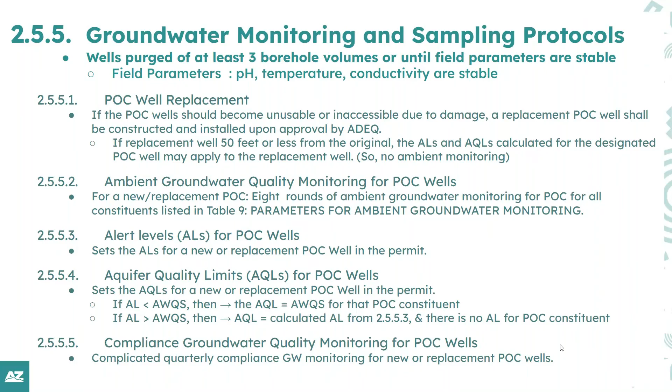Monitoring requirements, surface water monitoring and sampling protocols. I've never seen this inside one of our permits. However, we do have typically our surface water and our AZPDES permits cover that.

Analytical methods just tells you where you can find the Arizona State approved facilities to do testing. You must use our Arizona State approved methods. If we don't have one, then EPA approved methods can be used. The detection limits must be sufficient so that what they're testing for is actually lower than the limits that are inside your permit. And then it tells you, here's the link where if you're looking for a certified lab, you can find one.

2.5.8 is the installation and maintenance of monitoring equipment. So if you have specialized monitoring equipment inside your permit, we will have a section in there.

Contingency plan requirements. Again, a contingency plan is required when you come in for a permit. We want to make sure, because an inspector can go out to your facility at any time and ask to see your contingency plan. So when you come in for a permit amendment, we ask to see that contingency plan and review it to make sure it's sufficient and contains everything that needs to be in there.

It should be maintained at the location where day-to-day decisions are made. I recommend that you also put your permit in the same binder as your contingency plan, so you can find those two items real quickly when an inspector comes to your facility.

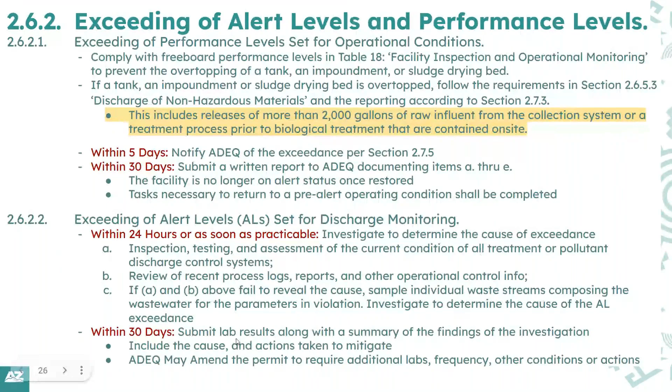Exceeding permit limit flow. If you exceed the alert level, then you should be constructing your next phase inside your permit, or let ADEQ know why for approval to not have to move forward. Like maybe you're just completely built out and you just had a high storm event, and you're going to go out and fix those issues in your collection system so you don't have those events in the future.

If you hit the alert level for the average daily monthly maximum for the final phase, then you are required to come into ADEQ for an amendment of your permit and start constructing as soon as possible. A good rule of thumb is once you hit 80% of your alert level, you should already be starting the design and permitting of your plant.

Exceeding of alert levels in groundwater. So if you are doing groundwater monitoring in your permit, you'll have alert levels for indicator parameters. I've never seen us fill anything out special for that.

Alert levels with pollutants with numerical aquifer water quality standards. Again, those AWQS standards are at the end of R18-11.

If you perform verification sampling, you need to perform it within 5 days. If you perform it and it meets the AQL, then no further action is required. If it confirms the AL exceedance, or if you opt not to perform that sampling, then you need to report to ADEQ.

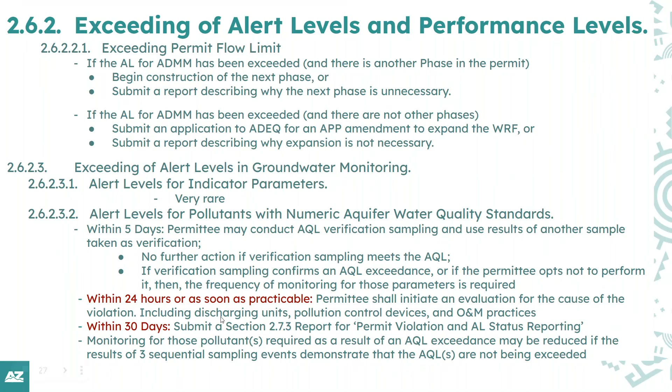Alert levels for protecting your down gradient users from pollutants. I haven't seen this part of our permit used as well, so typically you'll just see not required at time of issuance. If for some reason there was concern that something discharging from your facility might get into somebody else's groundwater well

they use for drinking, then we can have additional monitoring to make sure that doesn't occur. Alert level for groundwater. Some wells start drying out after years of use. A lot of wastewater treatment plants have been in use for 30 years, and their point of compliance wells are starting to dry out because of water usage in the area. It's really big in agricultural areas, and we don't monitor that. They're kind of exempt, so they're pulling the water out, and your well starts going dry.

You have to come back into ADEQ and let us know how you're going to build another well. Those requirements are listed in here. So if monitoring shows you do 6 sequential events and you're still having issues with the groundwater level, then you need to come back into ADEQ with a replacement well.

Discharge limit violations. These discharge limits are usually based on the R18-9 B204 and the AWQS in R18-11. If you do have an exceedance, you've got to report it to ADEQ within 24 hours, and you still have to send us a report within 30 days.

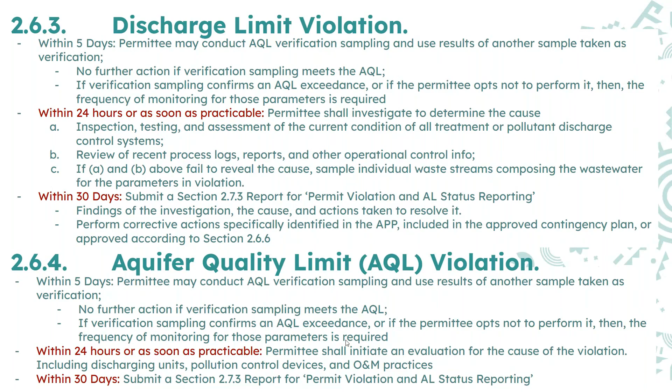There are emergency response and contingency requirements for unauthorized discharges. Within 24 hours, as soon as practical, you have to correct any condition resulting from a discharge pursuant to ARS 49-201 if that condition can pose an imminent and substantial danger to public health.

Discharge of hazardous substances, you have to report within 24 hours as well, if it has a potential to cause an AQL exceedance or could pose an endangerment to public health or the environment. You're seeing the trend - it's like 24 hours. Pretty much if you have a violation in your permit, the best thing to do is report it to ADEQ as quickly as possible, and then of course, don't forget to follow up with your 30-day report.

And all those reports are now submitted on MyDEQ.

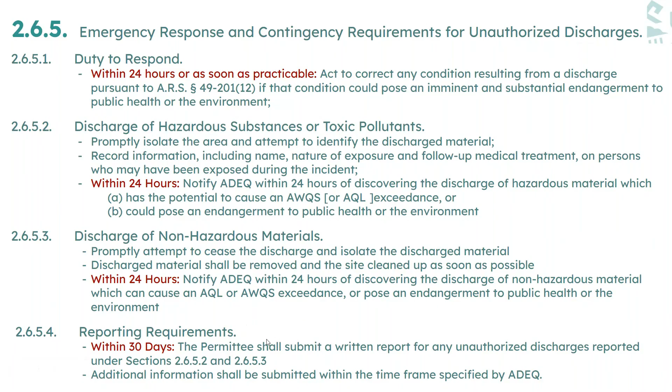Corrective actions - contingency measures identified in your contingency plan do not need to be approved by ADEQ, they were already approved when we reviewed your contingency plan. Now, if for some reason you have an exceedance and before you start doing cleanup or soil cleanup or cleanup of affected surface waters, you have to get that approval from ADEQ. And then again, within 30 days, you have to send us that report letting us know what happened and how you fixed it.

Reporting and record keeping requirements. These are really important, and it's one of the items that we find quite often - you'll have an operator that goes out and sees a system and they don't have a logbook at all, or they keep a logbook locked up in a room. The logbook is the communication between the operator and staff that aren't the operator in direct responsible charge. So when the operator in direct responsible charge comes to the facility, takes a look at it, any recommendations he has should be in there.

We've been to a facility where it looked like you could walk on the sludge because it was so thick. He says, 'Well, I keep telling him to waste.' I'm like, 'Show me the logbook.' Doesn't have a logbook? Then it never happened.

You're required in your permit to have a record keeping logbook. You have to have a signed copy of the permit with the logbook. You need to retain any documents for 10 years, so those logbooks are going to stay on your shelf for 10 years. Upon request, both the permit and the logbook will be available for ADEQ, and we will look for the on-site or remote operator direct responsible charge sign-ins in that logbook.

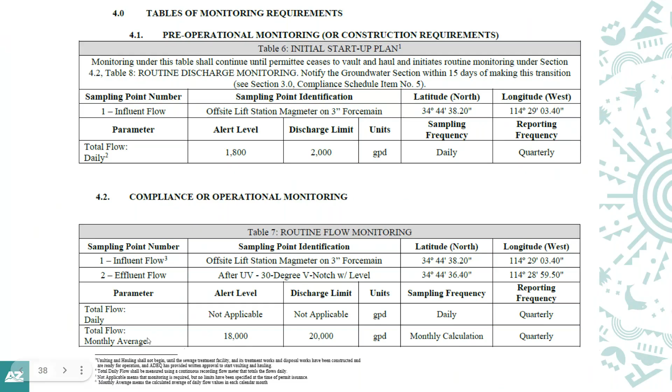Routine flow monitoring. So here's an example of where your sampling point will be, your sampling point identification, and then the location of it. And then you'll have total flow on here - in every permit, we'll have total flow. And then if you're doing reclaimed water, you'll have reuse flow. If you have a AZPDES permit, you'll have AZPDES flow.

So in order to measure, there has to be some way to measure those flows. If for some reason, say you have no meter for your AZPDES flow, then we do require you to submit a standard operating procedure on how you're going to calculate those AZPDES flows - like, yeah, we change this valve, we take a number off the meter and we subtract it from something else. Whatever you guys do to track those flows, we want to know how, if you don't have an actual flow meter in place.

The alert level for flow is 90% of the discharge level. It used to be 95%, but we had a lot of facilities getting into trouble and going over their discharge limits because 5% wasn't allowing them enough time to expand their facility. You don't have to report service water when you're reporting your flows - we consider that part of the plant and the treatment system. And then again, as I said earlier, once you get to 80% flow, you should be designing. Remember to read the footnotes.

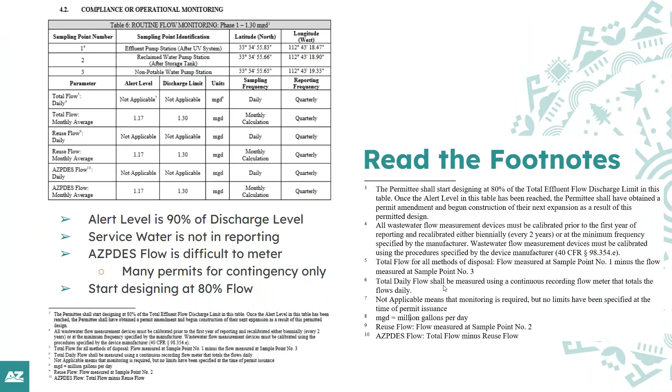A good example is R18-9-B204 requires you to perform 4 out of 7 samples for E. coli or fecal, and it says in a week, so it's a weekly calculation. Whereas when you go to the reclaimed water tables, it is a daily calculation, which means the difference is one - you're reporting 365 times, the other one you're reporting 52 times. But that's in rule. We're actually working, hoping that they change it in the next rule update so that they both match each other.

You're going to choose either E. coli or fecal coliform, so you have to choose whatever's inside your permit, and then you have to choose MPN or CFU. For CFU, a value less than 1 is non-detect. For MPN, a value less than 2.2 is considered non-detect. Again, the daily samples are 4 of 7 in a week, and that's in a calendar week, so Sunday through Saturday, unlike the reclaimed water monitoring.

And then you're going to do your 5-sample nitrogen rolling geometric mean. This is what it looks like in your permit, which looks like an equation. Some people afraid of math don't like that, but in Excel, you can easily just put this formula in to calculate your 5-sample nitrogen.

Reclaimed water monitoring requires fecal coliform. It will not allow you to do E. coli. So if you have chosen E. coli in your discharge monitoring, and then you're choosing fecal coliform inside your reclaimed watering table, then you're going to be doing two different sample variations, especially if you have the same sampling point for both discharges. Then you kind of want to have fecal coliform in both of them.

Enteric virus is required if you don't have, for instance, polymer facilities or anything else. Our rule says if alternative treatment process, or if alternative turbidity criteria used, or reclaimed water is blended with other water to produce the Class A+ water, then you must do the enteric virus sampling.

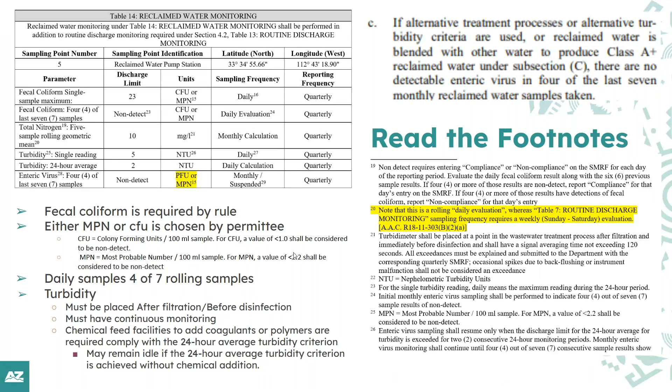If you do have a high turbidity event, then you should have a polymer or coagulant before the filters that will actually help filter out the turbidity, the TSS.

Groundwater monitoring. If you have groundwater monitoring, we used to have total coliform in there, and you had to do total coliform as part of the sampling. We actually went and tried to make something simpler for the permit and had rules that we had to look at if somebody else was trying to get away from total coliform.

But we just recently, when we updated the AWQS standards, they also updated the rule. So now you don't have to do total coliform, and we've matched the rule to B204, which is going to be your fecal coliform or E. coli sampling, which a lot of people have, like IDEXX or the Colilert or some other way to do it at their own facility. So they had to take the total coliform into town.

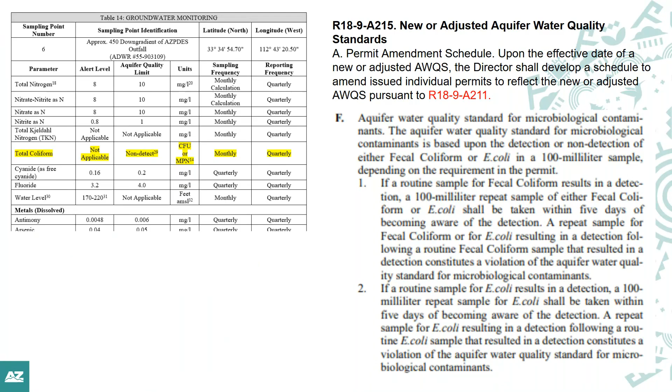This is one of those things where I appreciate the fact that ADEQ listened to the customer and actually made the two the same. Now we just need to do that with our reclaimed water rules. I'm always in favor of doing something that makes it simpler for the operator to operate their plant. I was an operator at one time, and I've been in those shoes before, and it's nice when things are just a little simpler for us.

This is the ambient groundwater monitoring table. So if you are installing a point of compliance well and you have to take those 8 samples, this is what you would be sampling for, and this would be a table in your permit. This is R18-11-406. I've referenced it several times today in the presentation, but these are the rules.

One thing I found when I'm reviewing permits is that somehow the permit writer put organic nitrogen in there, so your TKN and your total nitrogen, and they have limits for those in groundwater monitoring. Just so you know, there is no organic nitrogen in the AWQS rules. So if you look at your permit and go, man, I keep having to sample for TKN and report this total nitrogen, you can come back to us and ask that it be removed, because it is not in the numeric AWQS standards.

Now recently, I think it was August 4th, we adopted more constituents that are now in this table. So everybody is being required to come in and perform their monitoring, come in for a permit, or talk to the permitting team. If they don't need to come in for an amendment, every facility is still required to do this. So if you didn't know about this and you're an operator in direct responsible charge, take a look at it. The requirements for it are actually in R18-9.

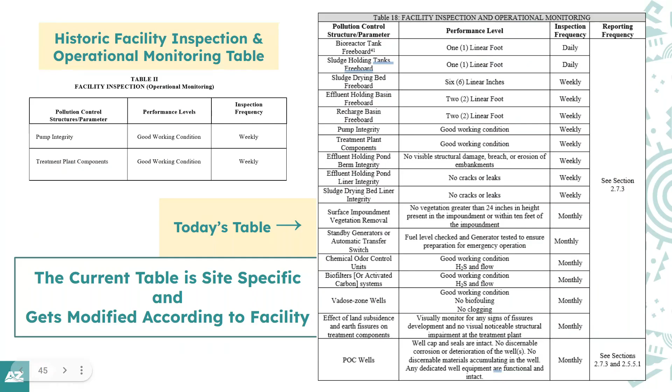Section 5 is after the monitoring tables. Section 5 just tells the application information - that we reviewed your contingency plan, and this was the date on your contingency plan. We're trying to do a process flow diagram and have a reference to a process flow diagram, so the inspector has something to take out with them. We also try to reference an equipment list, if there is one. Usually we don't put vendor names on the equipment list - we just have horsepowers and flows for pumps or blowers.

Then 6 and 7 is just boilerplate. I call it lawyer talk, but it's in every single permit. Section 6 and section 7 don't change for the permits.

That's it. Are there any questions?